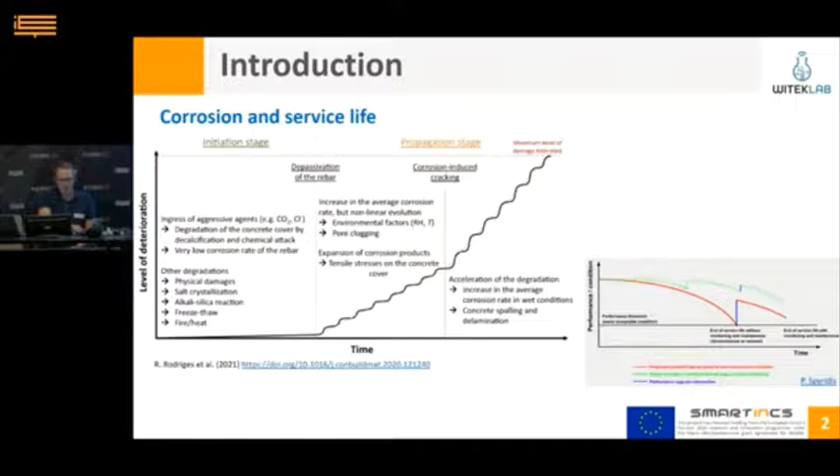Structural health monitoring is the process of using damage detection and characterization techniques for any kind of structure. It is a non-destructive structural evaluation method that employs several types of sensors embedded or attached to the structure. The SHM process includes installing sensors, data acquisition, data transfer, and diagnostics through which the structure's safety, strength, integrity, and performance are monitored.

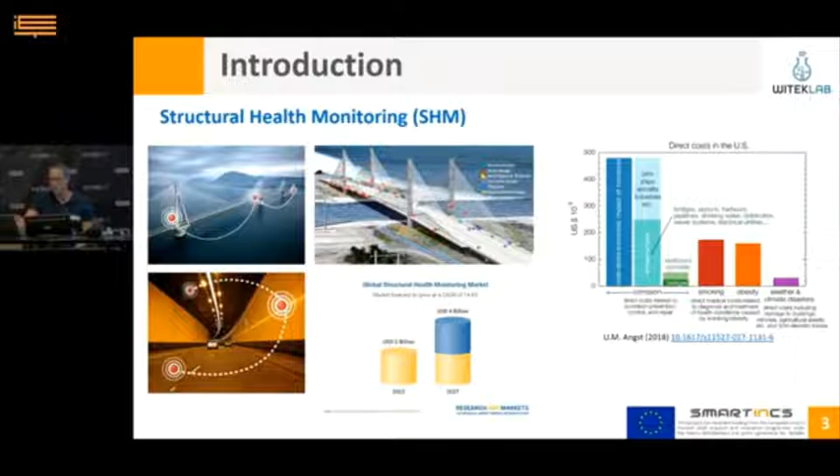The SHM market is estimated to reach $4 billion by 2027, registering growth of 14.6% in terms of value between 2022 and 2027. The rising growth of this market is driven by the importance of monitoring structural health, because the failure of infrastructure can not only incur very high economic costs, but also result in the loss of lives. Additionally, rigorous regulations related to the sustainability of structures, along with aging infrastructures, are propelling the growth of this market.

Regarding the evaluation of parameters of interest in corrosion-related monitoring, two main strategies can be defined. Those based on manual periodic inspections are usually performed once corrosion is quite obvious. They can be performed exclusively on accessible elements, and the related inspection costs are always high. Some of these manual on-site methods require destructive or semi-destructive methods.

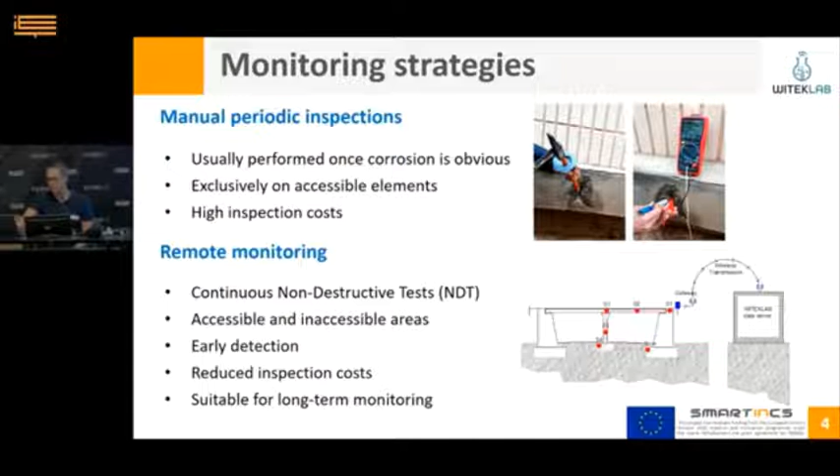On the other hand, remote monitoring is based on continuous non-destructive tests, often by means of embedded sensors. We can obtain data from accessible and inaccessible areas, and it can provide early detection of pathologies. This reduces inspection costs, but you have to plan them in the design phase. This approach is suitable for long-term monitoring, and it can be adapted in already built assets, although sometimes after complex installation processes.

To perform long-term monitoring strategies of corrosion, we should focus on techniques which can be automated, such as the ones that have been explained earlier. I'd like to introduce you a little bit to the technique we at Witeklab are commercially exploiting, which is Corrochip, which gives us continuous information on the corrosion rate.

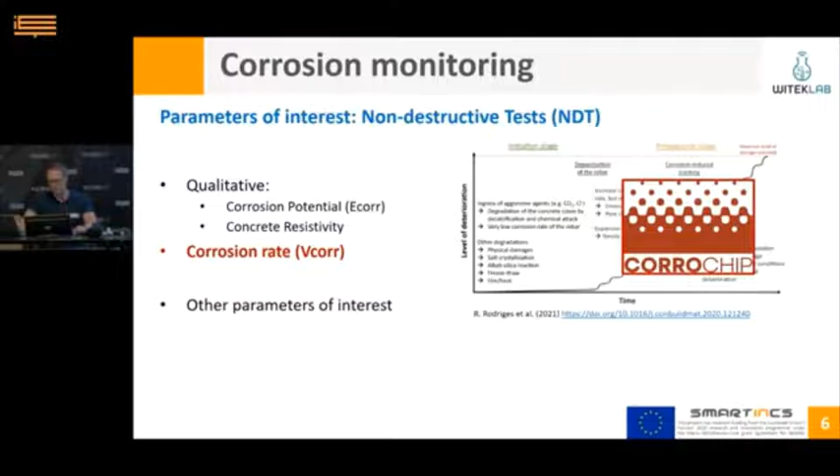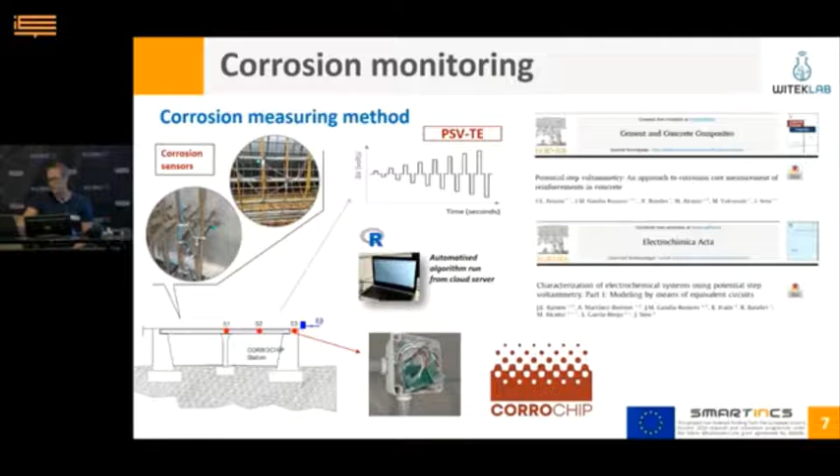This measuring method was patented at UPV in Valencia a few years ago, and is based on the use of embedded sensors. Those sensors are measured using an electronic device which applies a series of anodic and cathodic voltage pulses. In this demonstrator, we installed the sensor in one of the pillars that were installed inside the water by the dock, and we are now monitoring corrosion-related parameters and enhancing the infrastructure safety.

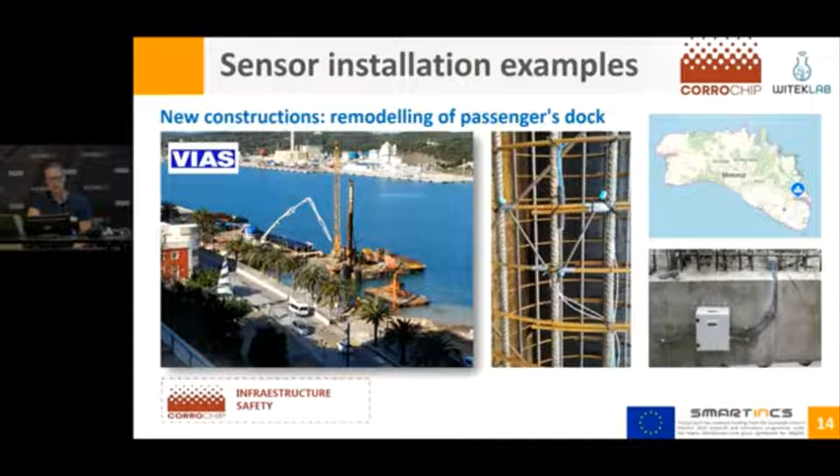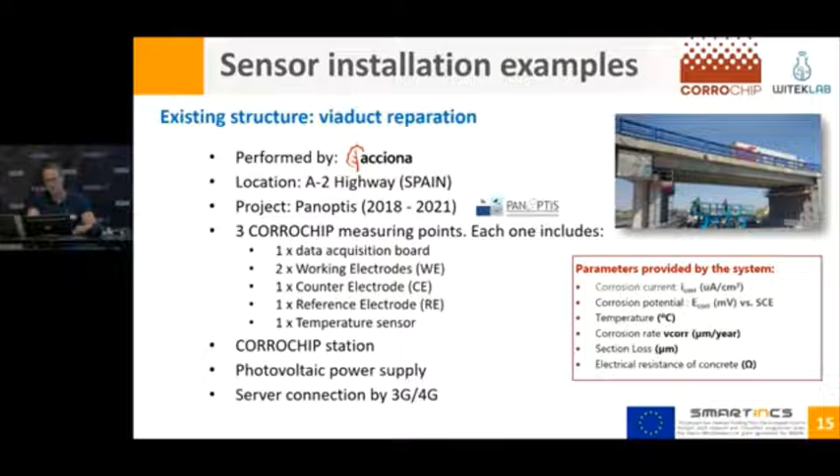The second example I wanted to show is actually a repair of a viaduct that was performed by Acciona. In this case we have three measuring points with two working electrodes and one counter electrode, and in this specific installation we were using a photovoltaic power supply, so we are not dependent on the main electricity supply, and again uploading the data through a mobile network.

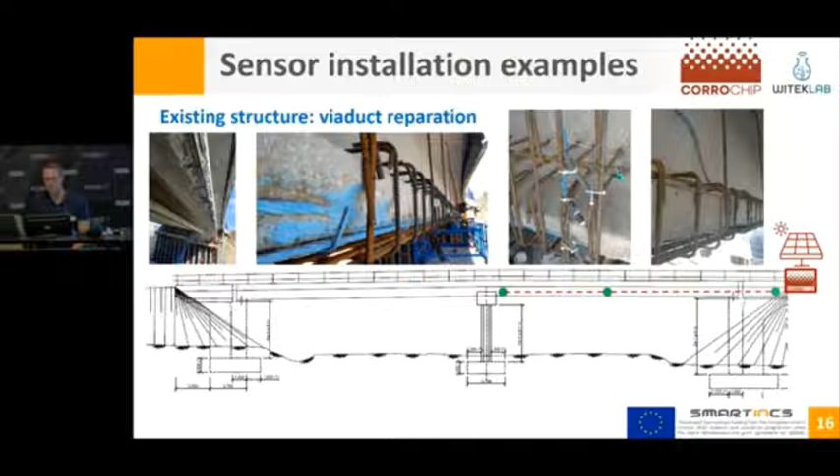This is a very interesting application example because we are installing the sensors on a pre-existing structure whose performance was being reduced, so they decided to repair it by installing new reinforcement on the existing beams, and then new concrete. So we are monitoring this repair procedure, and now we have data on how these new reinforcements will behave over time.

As you can see here, the installation process was started before the new concrete was poured, and after that we have to take the cables that come from the sensors, connect them to the electronic measuring devices, and send all this cabling to the gateway that will upload the data to the cloud server for post-processing and then visualization on the web application. As you can see, after the procedure is finished, it's like nothing happened there.

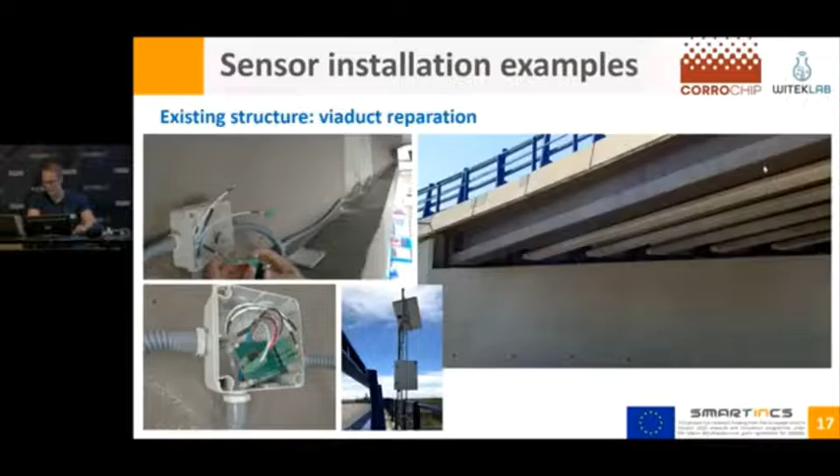So the most attractive thing about this kind of project is that we can access the data from anywhere. This is our website for our Corrochip product. We have geolocalization of the assets we are monitoring. Once we go into one of the installations, we can observe geolocalization, some information, the plans, sketches of what has been done, the number of sensor nodes we have, which kind of sensors we have here, and the number of them.

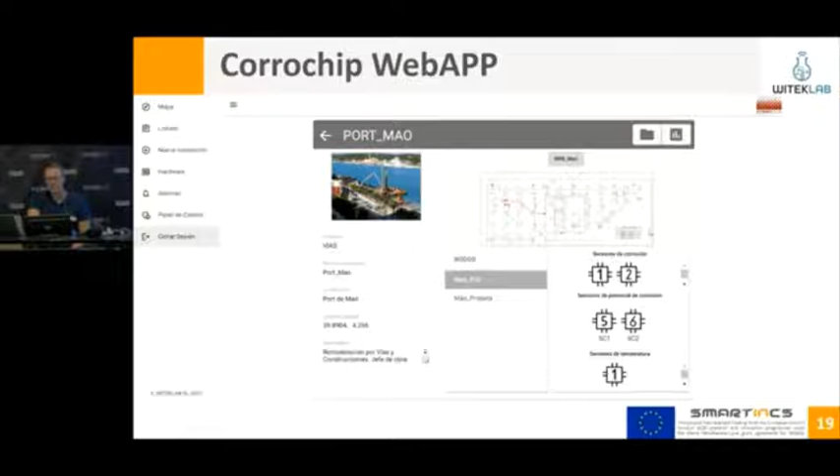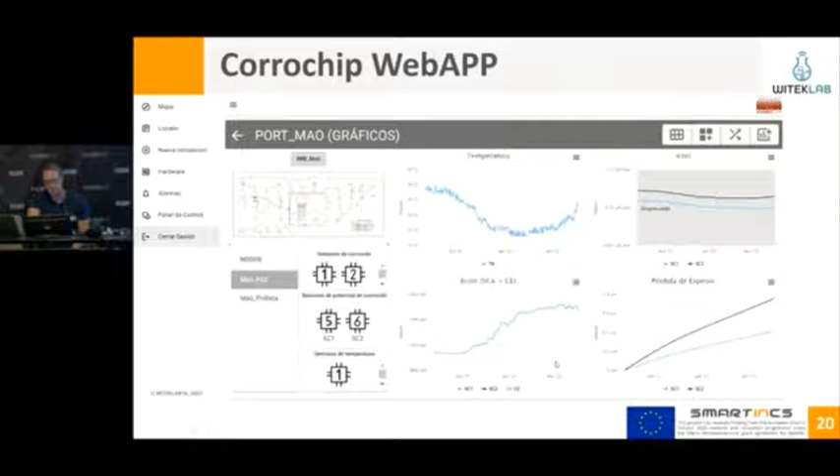And then we have another visualization window where we can visualize all the readings that have been made, since it's almost 1 year of monitoring. We can see the evolution of the sensors. So far, no important corrosion processes have taken place.

This is a different example, where 8 sensors were plotted. We can overlap the readings of all of these sensors. In this specific example, some of the sensors were under significant corrosion processes, and we can see a significant evolution of one of the sensors, which was in quite a passive state and became active after an episode, probably of a microcrack or something like that.

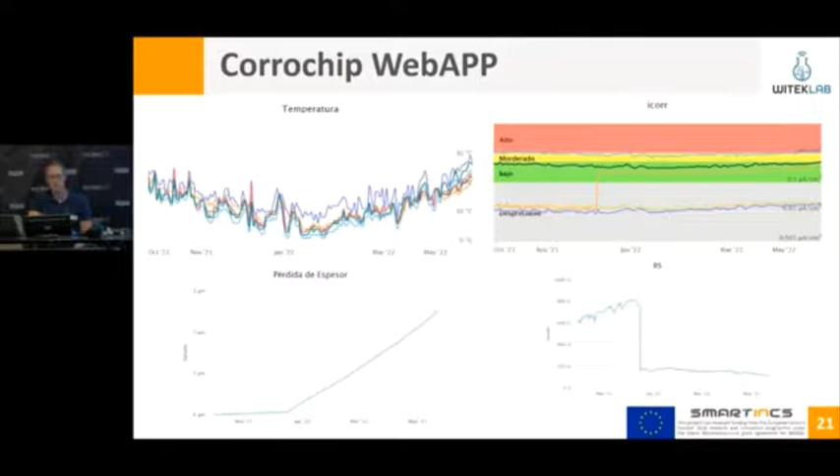The way we are calculating these corrosion currents allows us to calculate the thickness loss, and this comes from the model that was patented at the UPV. We can see what Dr. Gandia explained before: how a Tuutti diagram can be plotted, because after a passive state and the initiation process, the propagation process continues. And this is another of the relevant parameters, so you can combine all the inputs you have from any of the sensors to compare and analyze what's going on.

Not only specific corrosion sensors; you can use additional sensors to monitor reinforced concrete structures, and we at Witeklab have the option to install any other commercial sensor you could think of. This is an example of a mobile application where we were monitoring CO2, temperature, humidity and accelerometers. You can navigate through the application and obtain all the readings just on your mobile phone.

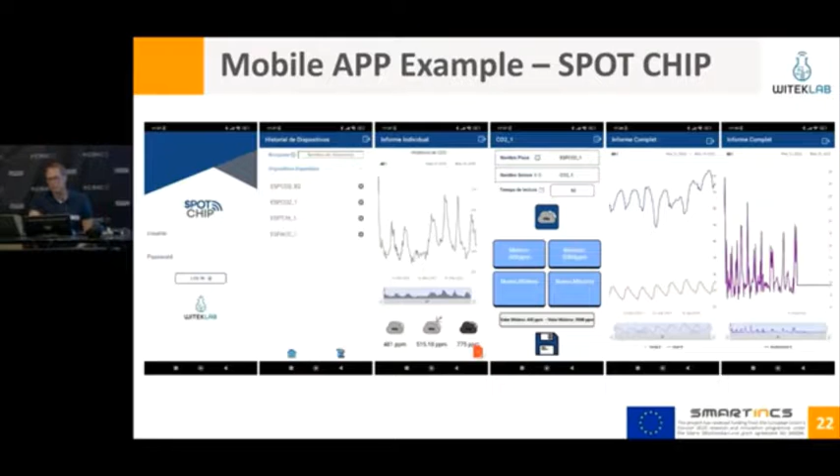So for long-term monitoring, it's very comfortable to just take your phone or go into a website from your office and obtain all this data without the traditional way of doing these things, where you have to take the car, travel, and do manual inspection.

I don't know if we have time. I think we have. Well, okay. I just wanted to show you. I don't know if it is connected to the internet, probably. So we could just take a look at how easy it is to navigate through data once you have all the... okay, that's not my computer. So, well, okay, we have to skip that.